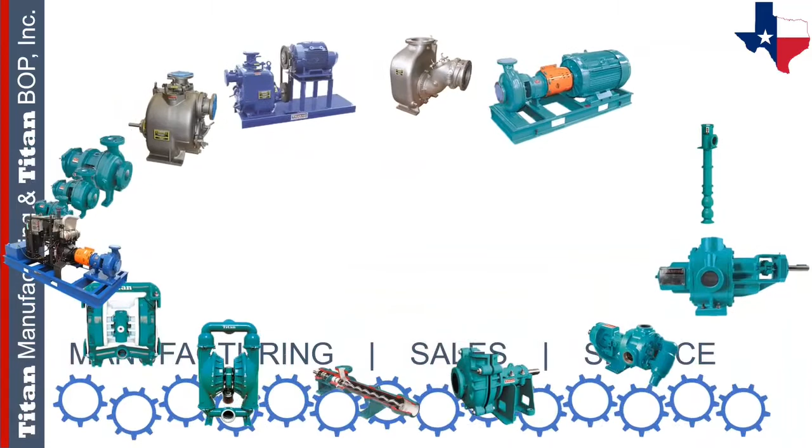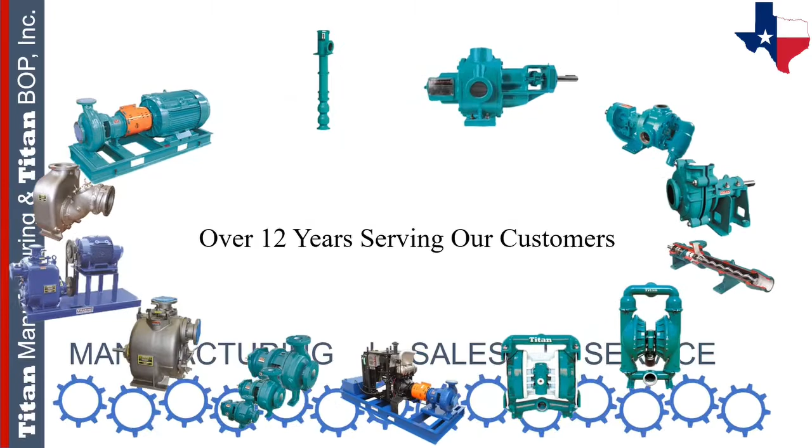This is our first webinar of 2021 and we are excited. This also marks the 13th year of business for Titan and an overall 12 years of experience serving our customers right here out of our headquarters in Houston, Texas. Titan's kind of become a veteran in the industry of pumping solutions, and over the years we've always tried to expand our products to meet our customer needs.

And in this webinar, our main objective is to unveil our new style of gear pumps, which we are so excited about. We also want to take a look back at how Titan performed in 2020. For those of you that don't know, our performance evaluation is based off of a survey that we send out to all of our customers who allowed us to be a part of their business pumping solutions in 2020. Here at Titan, we are very happy with the results and we believe they speak for themselves. So let me pull those up for you now.

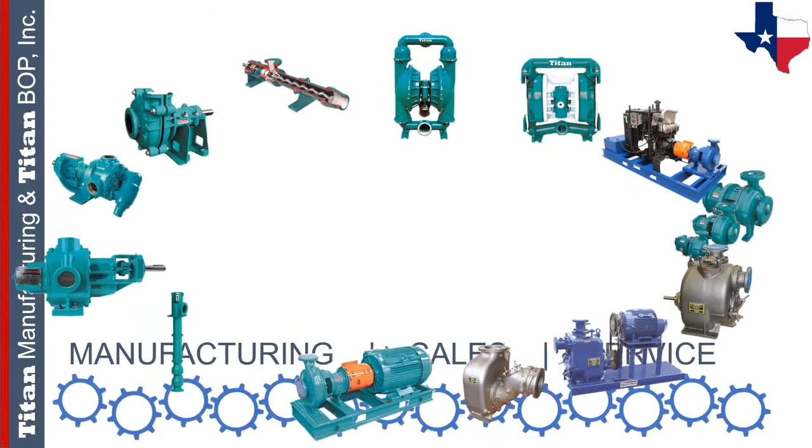As you can see from the bar chart, it's displaying our satisfaction survey for 2020, and the vast majority of our customers are very satisfied. With overall customer satisfaction rising from 2019, we've been able to achieve our customer satisfaction goals, and year after year, Titan has seen steady positive growth in all aspects of customer satisfaction. Our customer-focused business is aided by our adherence to the ISO 9001 quality principles.

And that being said, we did something a little bit different this year. Instead of sending this survey out as a PDF attachment or faxing it, we did it digitally through a website. What we did was we sent a link to all of our customers via email, and all they had to do was click the link, answer a few questions, give their comments, and submit it. So we thought that was a lot easier.

Nowadays, a lot of things are done online. As technology is advancing, Titan wants to follow that trend. So we hope that those of you that did do the survey liked it better this year, and we appreciate all of your feedback.

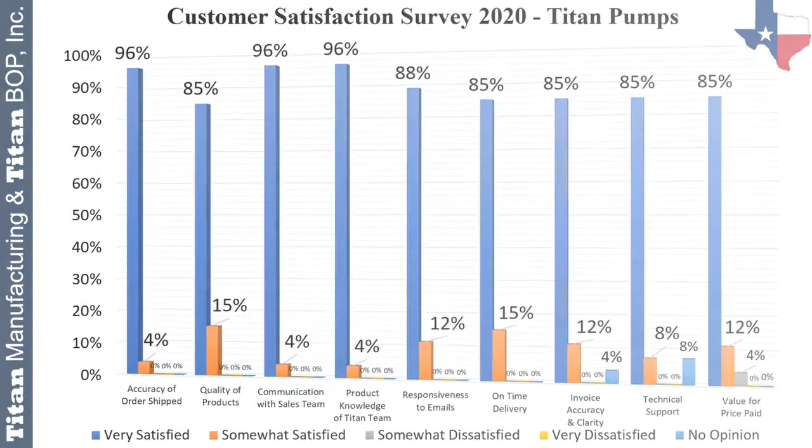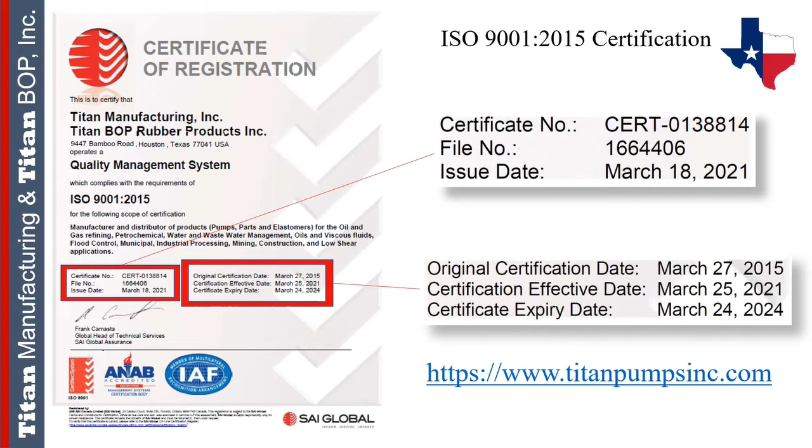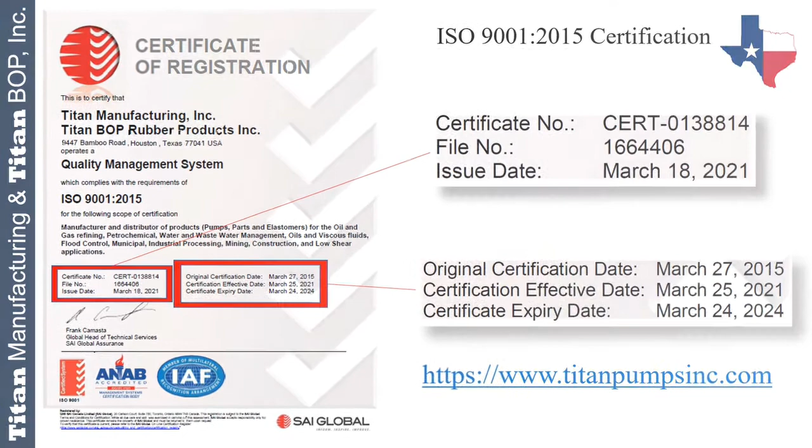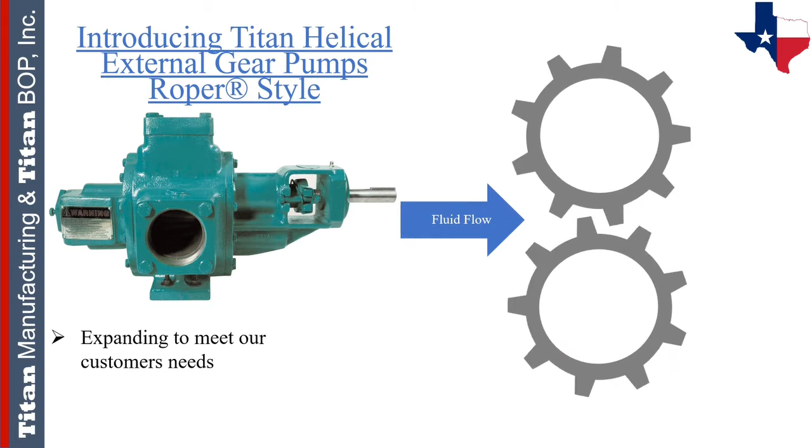All right, so finally I get to introduce our newest product, the Titan Helical External Gear Pump, Roper style. We are so excited about this new product, and we just want to talk a little bit about it. In the next upcoming slides, we'll go through some technical information, and we have a short video, and we have lots of information to share with you.

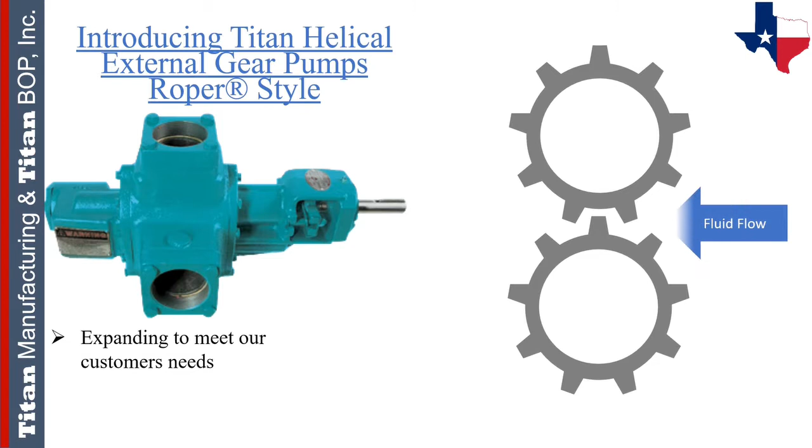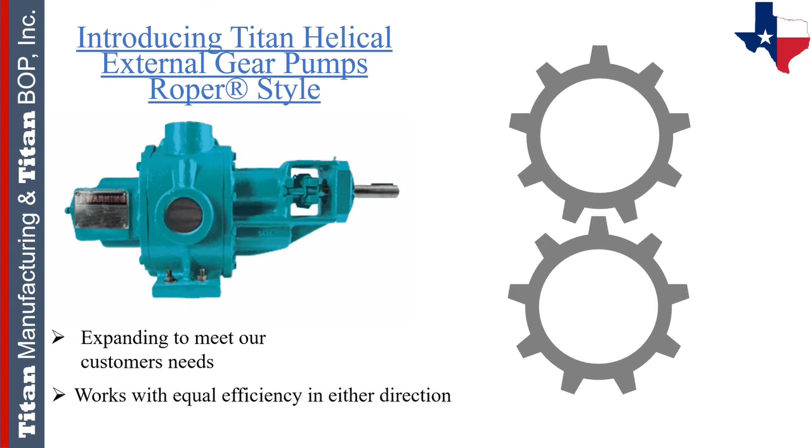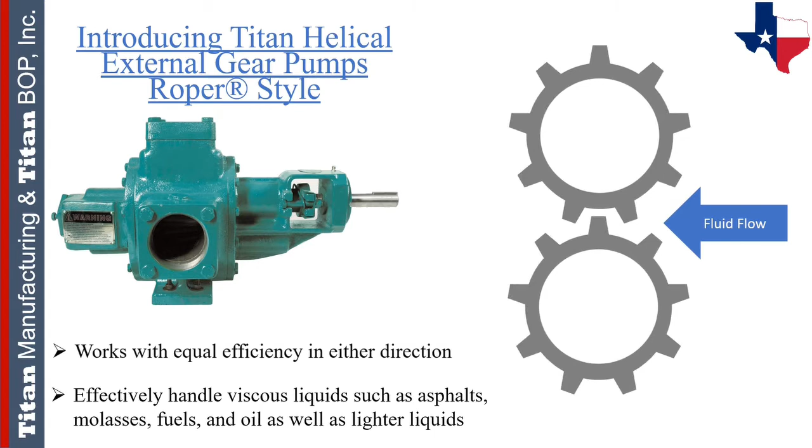So the cool thing about these helical external gear pumps is that these pumps operate without problems or difficulties and with equal efficiency in either direction of rotation. They effectively handle viscous liquids such as asphalts, molasses, fuel, and oil, as well as any other lighter liquids. Titan's goal is to be a hub for pumping solutions throughout the fluid management industry. So with the addition of this external helical gear pump into our family of product lines, we plan to better help solve our customers' ever-growing needs.

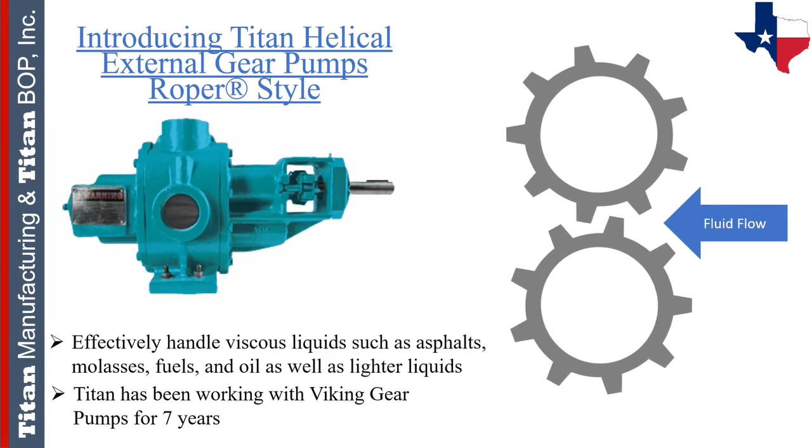Titan has found major success in the past providing internal gear pumps, which are the Viking style, to our customers. Our engineers and sales team have been working with gear pumps for about 7 years now. So we have a fine-tuned understanding of gear pumps and the appropriate applications they're suited for. So feel free to contact us if you have any application inquiries.

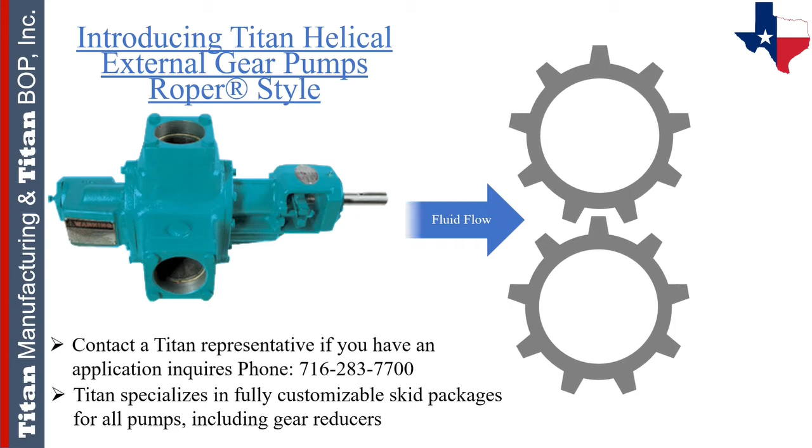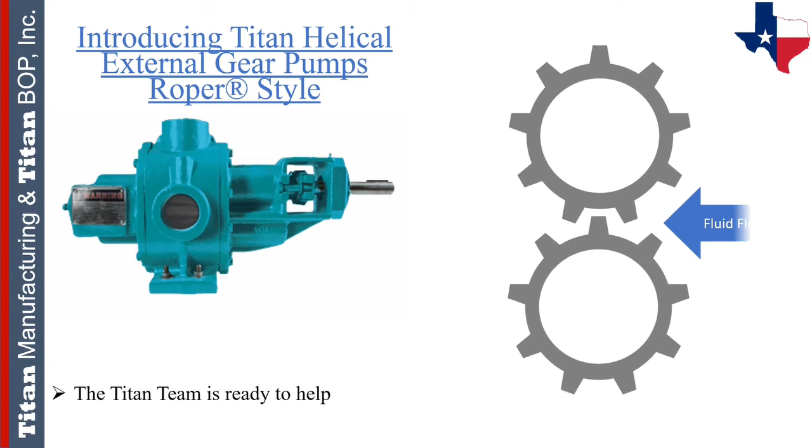Titan has the capability to produce fully customizable skid packages for any of our pumps. This includes the gear pumps. Like I said, we do customizable pump packages with the gear pump where it would be mounted on a skid base. Sometimes a gear reducer is required, and we could do that. It'll be coupled to a motor. So like I said, our engineers can put something together for you, put it in a quote, send you a drawing or whatnot, and go over any kind of application requirements that you have.

So here are some advantages of the helical external gear pump. One is that the helical gear pumps reduce mechanical stress. They have minimal physical contact between gears, which reduces friction. This also reduces overall wear on the gears.

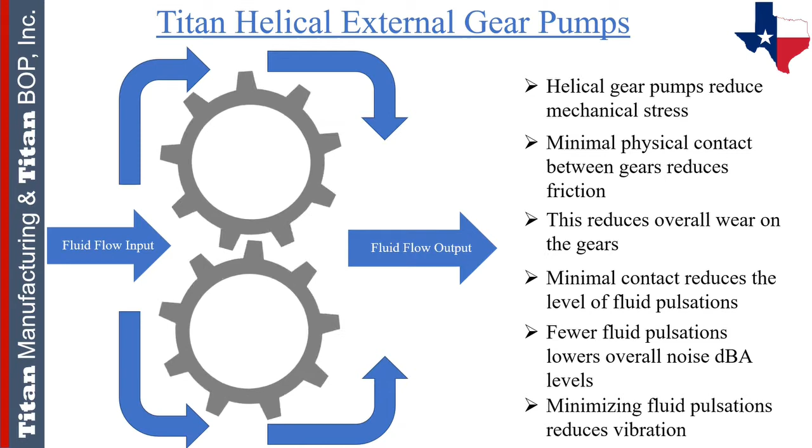Minimal contact reduces the level of fluid pulsations, and fewer fluid pulsations lowers overall noise dBA levels. This minimizes fluid pulsations and reduces vibration. The combination of these factors increases overall pump life by reducing pump wear. The simplicity of the external gear also makes it one of the easiest pumps for maintenance.

Titan's helical external gear pumps are available in 5 models: the 4H, 8H, 12H, 16H, and the 20H. The models come in port sizes ranging from 2 inches to 4 inches with NPT and flange options available. The pumps are made of cast iron, and some models are also made in stainless steel with relief valves in both materials. Internal bushings can be carbon or bronze depending on your application needs, and the pumps are available with packed boxes or mechanical seals.

Due to its design, they can be direct driven with belt drive transmission. Using this cross-reference chart, you can easily determine the Roper style equivalent. Titan's helical external gear pumps are made to match the exact footprint of the Roper model, so please keep that in mind. And real quick, I want to go over the nomenclature here because I know sometimes it can be confusing.

So the H stands for pump head without an outboard ball bearing. HB stands for tapped port case with an outboard ball bearing. And then HBF stands for flanged ports with an outboard bearing. And then the HBFRV stands for flanged ports with an outboard bearing and relief valve.

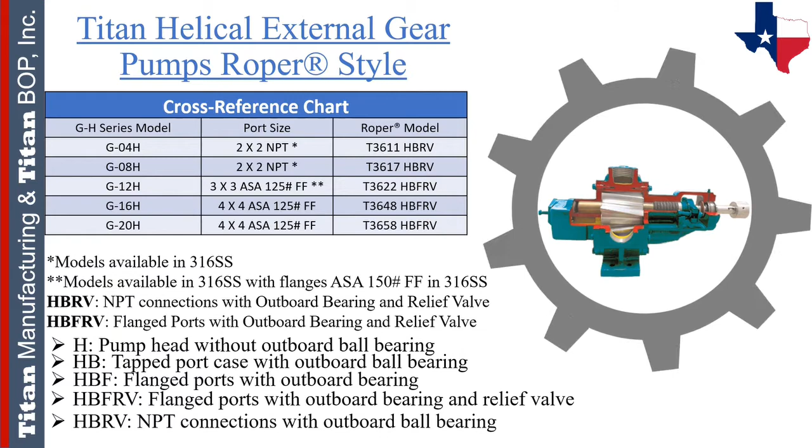So this is Titan's model number key, and it's a quick and easy system to determine what your helical gear pump part number represents, and it's also an easy way to determine what options are available for your application. As you can see here on the key, the first character is a G, and that will always stand for gear pump. So even on our internal gear pumps, the first character is always a G.

And then the second characters will be the size, and then you've got the series, configuration, if it's jacketed or not, the seal type, the material, and then the bushing. So I know a popular question is, I don't know if I have a carbon bushing or bronze bushing. Well, if you look at the part number, you'll know that if you have a 1 at the very end of your part number, you have a carbon bushing, and if you have a 2, it's a bronze bushing.

So you can just kind of look here, and I'm sure that this information will be available on our website as well. But just wanted to share this with you. And also keep in mind that our engineering department is always available to help with material construction recommendations if you're not certain of what you need.

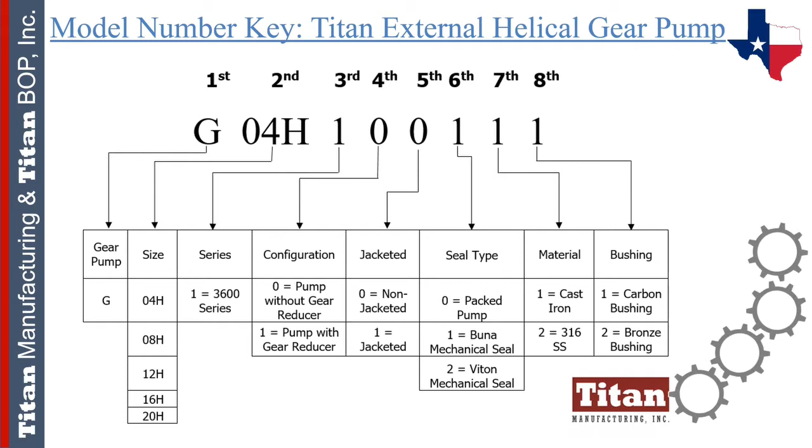Let's look here at this graph, which represents a general output curve to show what these pumps are capable of achieving. Now, of course, this will always depend on the operating conditions of each individual system, such as the flow, discharge pressure, viscosity, etc. But this graph is just for general representation. So please consult with a Titan team member regarding determination of proper pump sizing before making a selection if you're not familiar with doing so for these types of pumps.

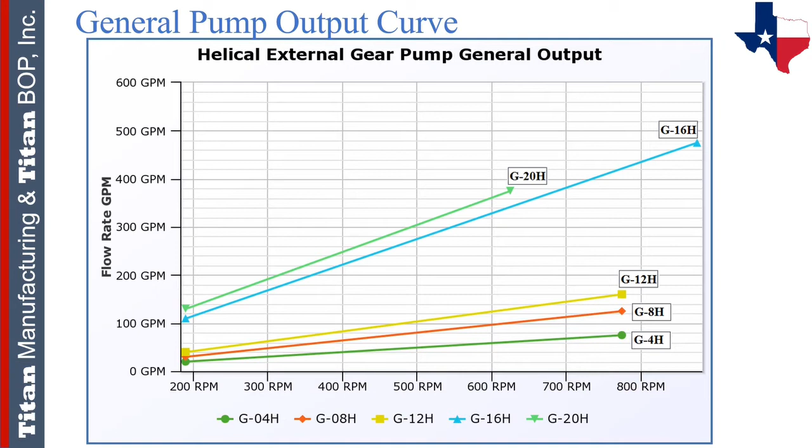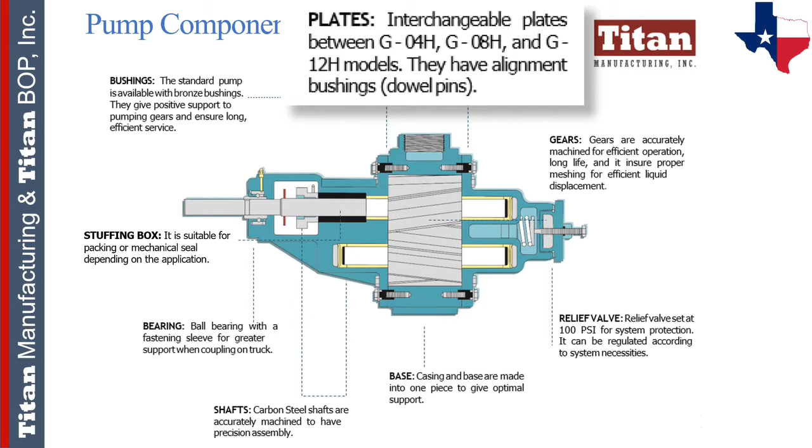Okay, so I want to go over some of the key features of our helical gear pump using this cutaway diagram. First, we'll talk about the plates. So the plates on the 4H, 8H, and 12H models are interchangeable, and they have alignment bushings, which are dowel pins. Another thing we'll talk about is the gears. Gears are accurately machined for efficient operation, long life, and ensure proper meshing for efficient liquid displacement.

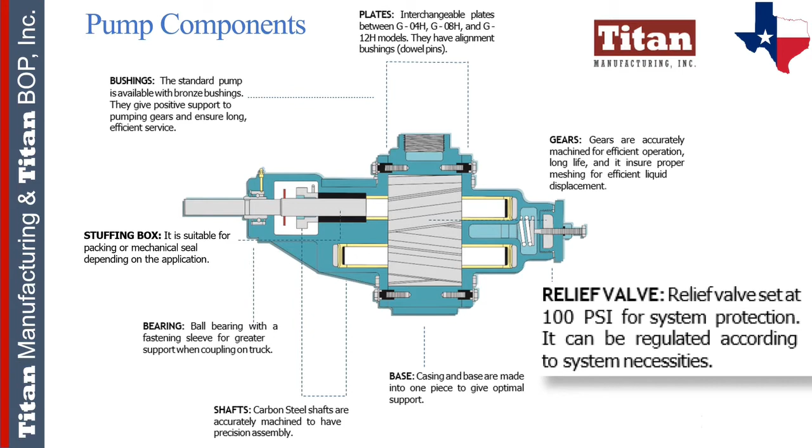Next is the relief valve. Our relief valves are set at 100 psi for system protection, but it can be regulated according to system necessities. And then the base. So the casing and the base are made into one piece to give optimal support. And then our shafts. So these pumps are made with the standard carbon steel shaft and they're accurately machined to have precision assembly.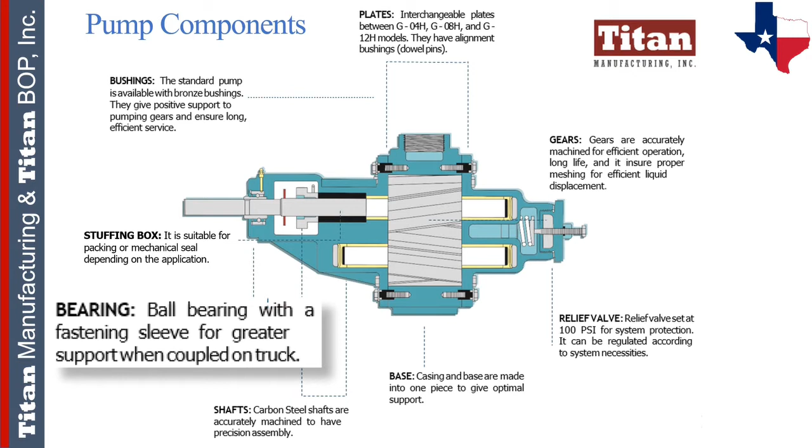And then the bearings. So these pumps have ball bearings with a fastening sleeve for greater support. This will help when coupled to a truck. And then the stuffing box. So our stuffing boxes are suitable for packing and mechanical seal. So it just depends on your application and your application needs.

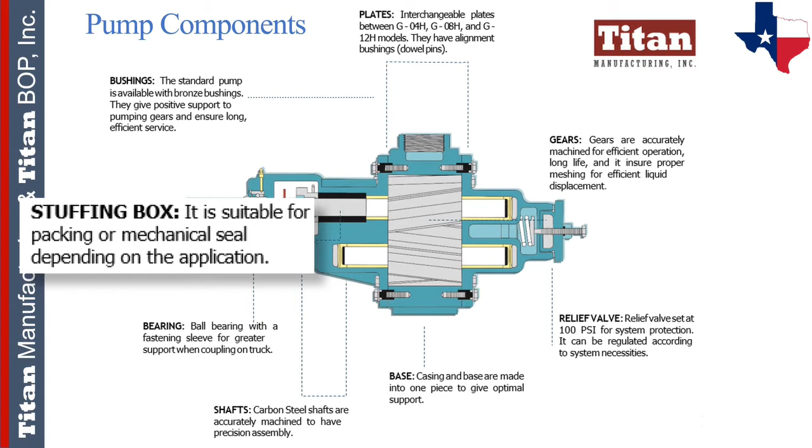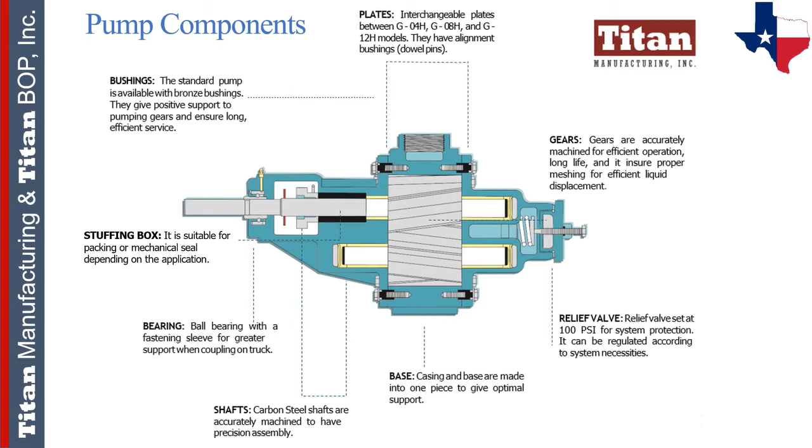Then the bushings. The standard pump is available with bronze bushings, and they give positive support to pumping gears and ensure long, efficient service. And again, we do offer the carbon bushings as well. And then tolerances on the casing are machined to the minimum. This offers the best pumping efficiency. It also has two drain plugs to drain the pump when it is necessary. So that's just key features on this helical gear pump.

All right, so the cool thing about this pump is the direction of rotation. The direction of rotation is determined according to the system, but the pump works with bidirectional efficiency. So the direction of rotation can be inverted. The suction and discharge ports can be modified to different positions, and that is why this pump is most adequate to be mounted on trucks. It's super easy to change. So you'll see in these images, high drive is figures 1 and 3, and then low drive is figures 2 and 4.

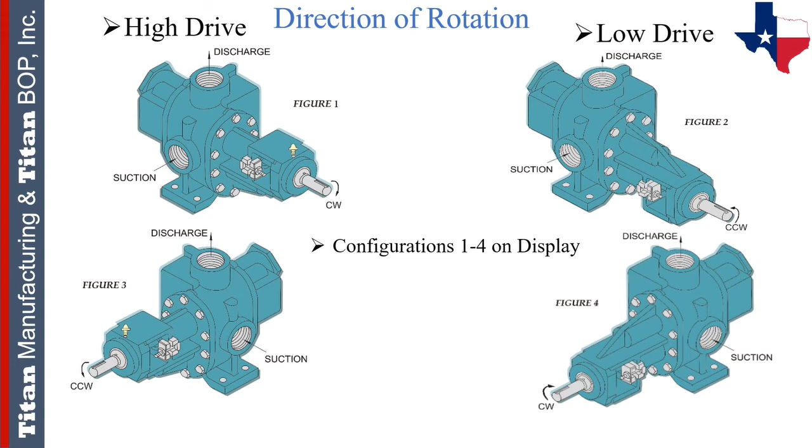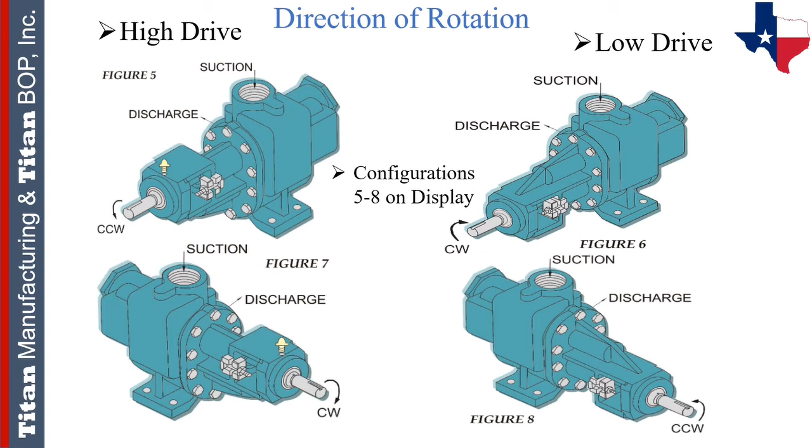All modifications can actually be made in the field simply by disassembling and reassembling the pump. There are no additional parts needed for any configuration. However, the relief valve must always be on the discharge side of the pump, so please keep that in mind. And as you'll see in these images, high drive is figures 5 and 7, and low drive is figures 6 and 8.

So these helical gear pumps have two standard material of construction variations. The standard is the cast iron construction, and the cast iron construction would come with a cast iron casing, gears, plates, and relief valve. This will also come with the steel 1045 shaft, bronze bushing, and Teflon with graphite packing.

And then the second material of construction will be the 316 stainless steel option, and that one comes with the 316 stainless steel casing, gear, shaft, plates, and relief valve. It will also come with the carbon bushings and the Teflon with graphite packing. And keep in mind, both models do have an option for a mechanical seal. So if you are going to install a mechanical seal, you would need the mechanical seal gland screws and the mechanical seal gland O-rings. So please keep that in mind.

I do want to touch base a little bit about the differences between the 1045 steel shaft and 316 stainless steel shaft. They're both iron alloys, and they have 68% of their average alloy composition in common. There are 32 material properties with values for both materials, but one of them is more expensive, which is the 316 stainless steel option. Now that option would be recommended if you were pumping something corrosive or very acidic.

But as for the standard construction, we just have the 1045 steel shaft because it's just as good, it's reliable, it's strong, and we recommend it if you're not pumping anything which requires 316 stainless steel. So if you want more information on that, definitely let us know, and we can send you some sort of write-up and give you more detail about what's in the 1045 steel and what's in the 316 stainless steel.

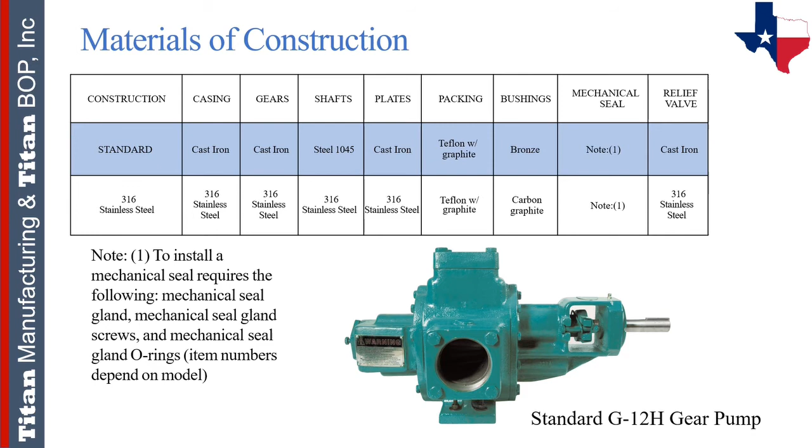So real quick, shown here on this slide, notice the faceplates are interchangeable between the 4H, 8H, and 12H models. And keep in mind that this is also true for the jacketed versions of these pumps, which we'll talk more about on our next slide. But anyways, if you require a parts list, please let one of us know and we'll get that sent over to you.

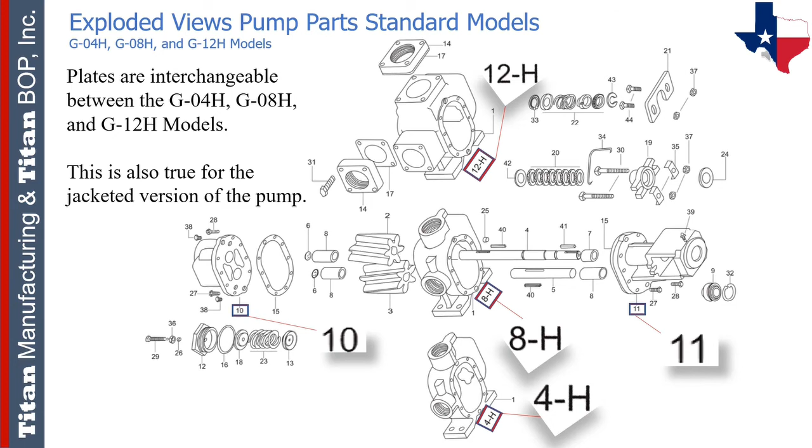So we only have jacketed options for 3 of our models, and those models are 4H, 8H, and 12H. These are specially designed to handle temperature sensitive applications. They do this by their jacketed plates that provide a cavity or jacket on the external wall of the plates where steam or heat transfer fluid can be passed to control the temperature of the fluid in the pump. So if you think that this might be something you need in the future or you're interested in knowing more about, please let us know and we'll send you more information.